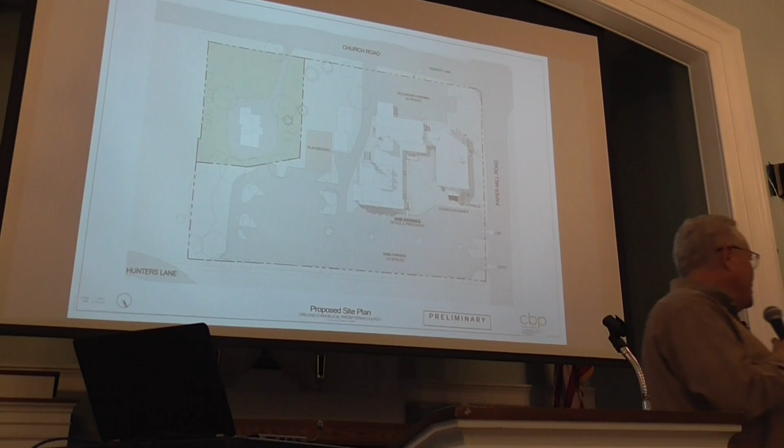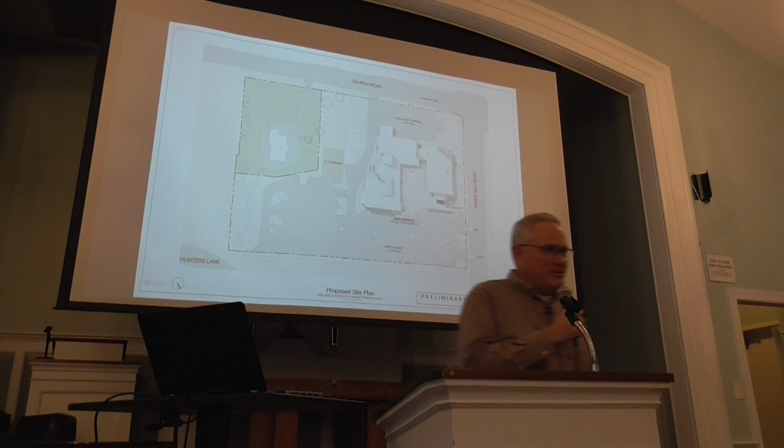So let's just look to God in prayer. Let's pray. God, we are thankful for the opportunity that we have to be here in this place. We're thankful for this congregation and its faithful witness over these many years. Lord, we look forward to continuing that as you give us able strength, courage, and grace to move forward. We want to be a beacon of your light and beauty in this community, in this place, in this corner. Father, give us your ingenuity and grace as we hear these exciting plans that have been in the works for some time now. We're thankful for the gifts that have been given to get us to this point, and we pray that you would be honored and glorified in it. We pray in Jesus' name, amen.

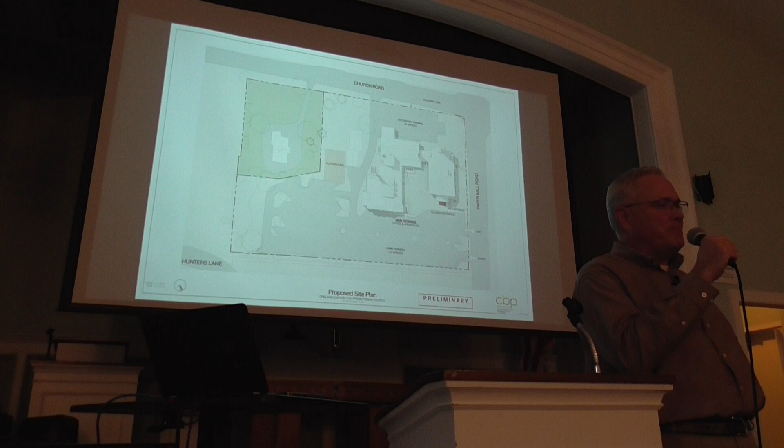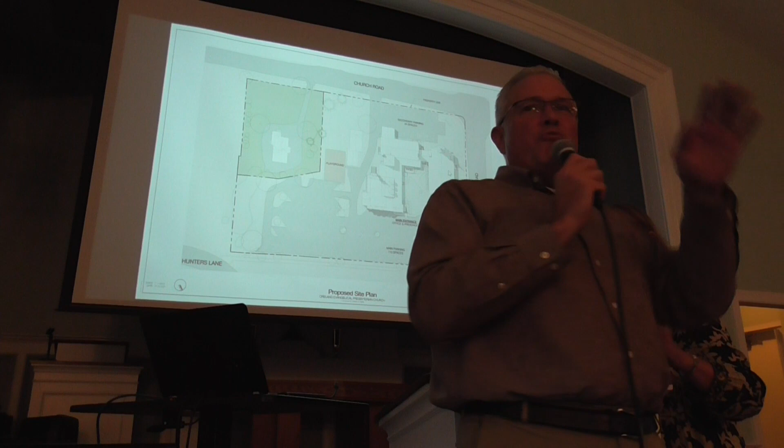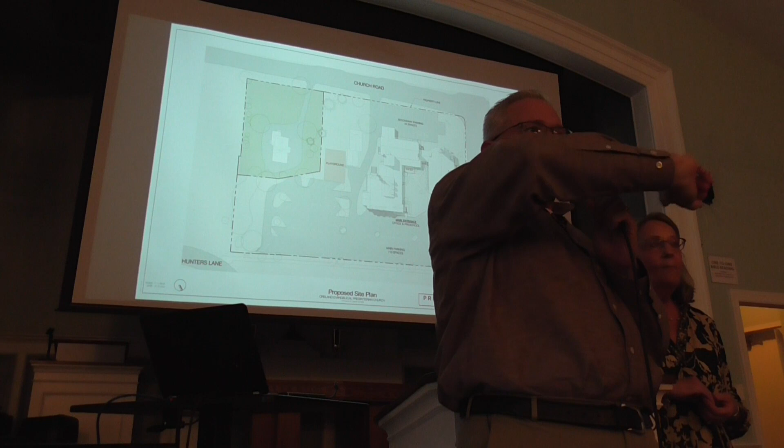Hang on, I'm sorry, I just want to introduce some of the arts team: Daryl, Rebecca, Tim. Am I forgetting anybody? Sandra, of course, myself. Also Janie Bray, Larry Schmidt, John Wynn, Graham, and Glenn Rossi. So that's the group that's been on this so far, and Adele Larkin had been too.

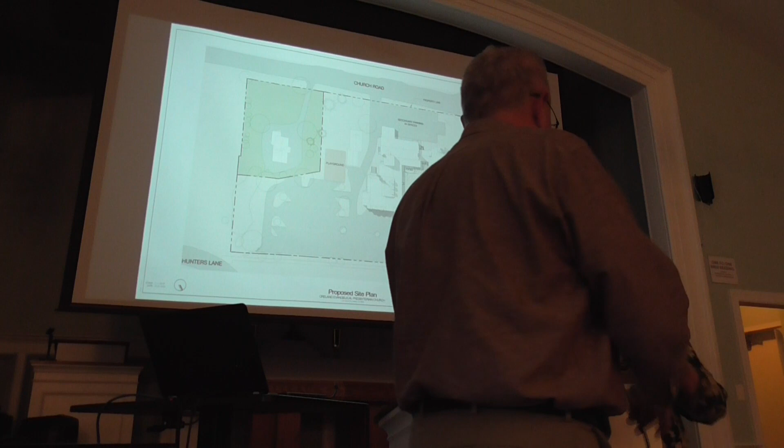Good morning, friends, or good afternoon. We are so excited to share with you today the preliminary architectural plans that have been amazingly designed and crafted for OEPC by Nancy Bastian and Nora Bergston of CBP Architects. Please join me in warmly welcoming Nancy, who is the managing partner, and Nora, an associate with the firm. Kindly take a minute afterwards and greet them in person.

I had the great pleasure of working with this firm years ago. They were superlative then and they are superlative today. From the outset, Nancy and Nora not only have listened to us, they have heard us. They thoughtfully processed all that we shared and showed a clear understanding of and respect for our vision and hopes, while honoring and embracing the opportunities of our beautiful facility and campus.

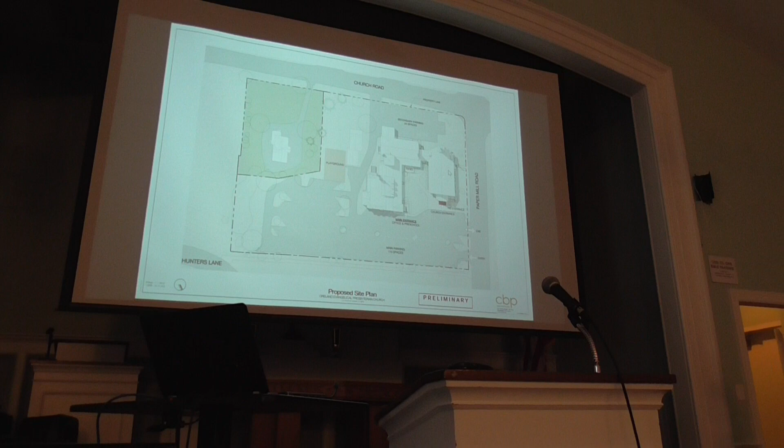Thank you, Sandra. Good morning, everybody. I am Nancy Bastian from CBP Architects. Just very briefly, we are a Philadelphia-based architecture firm. We're mid-sized, I think there's 18 of us. We're located in Old City, downtown at 2nd and Market. I have been with the firm for, I think, 36 years. It's a long time. The firm's been around for 41 years, and Nora's been working with me for at least 10 years, right? 11 years.

We do all kinds of projects. We do a lot of institutional work, a lot of residential work, some civic work. But we really love these kinds of projects where we come and meet with a group who are trying to figure out a puzzle. And this place is a puzzle, it's fair to say.

So I'm going to walk you through a little bit of what we saw when we came, and then Nora's going to walk you through what we're proposing. So just to orient everybody, what's up on the screen right now, even though it says proposed site plan, that's wrong, sorry. I just wanted to orient you all to the existing site plan.

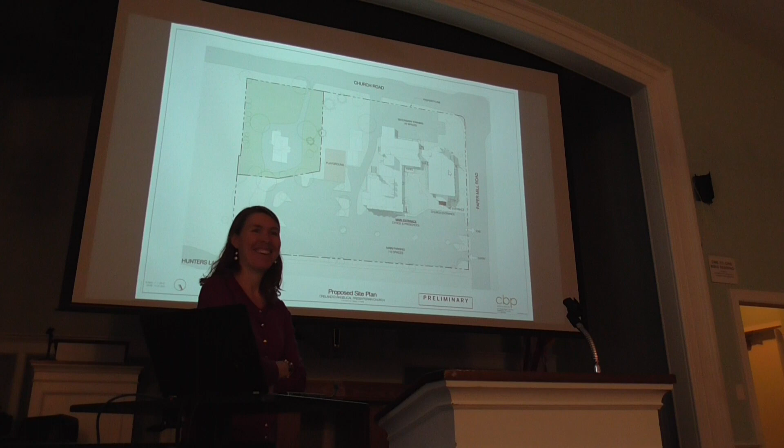Here you see the sanctuary, here's Fellowship Hall, here's the rest of your building. There's Paper Mill Road and Church Road. First time I came, they had me come in and park off of Church Road. I came up and knocked on a door and I'm like, something's wrong. Finally made my way around here and came in, which I realized is the main entrance. So that was the first thing I wrote down in my notebook. That's a bit confusing. But, GPS. Yes, the address, and that's where it takes you.

Yes. So anyway, here's your main entrance. Obviously, here's your main parking, about 110 spaces. You have a beautiful, large campus that accommodates quite a bit of parking. Here is that secondary parking, the playground area, as well as, is it the mini? The Little Man's. The little manse here, and then the manse here.

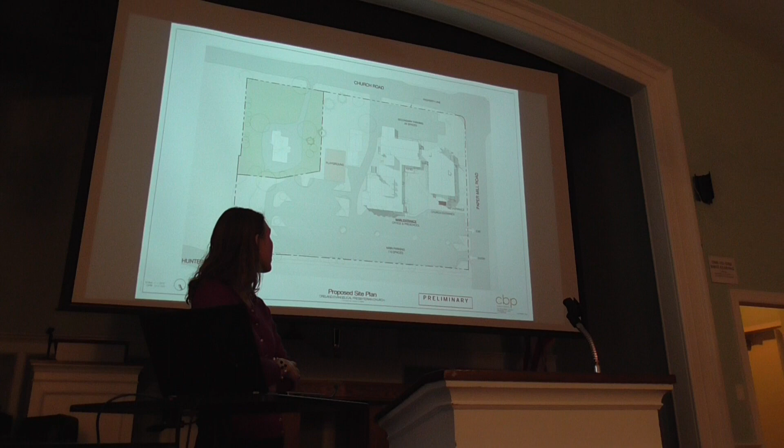So, you know, you have a wonderful property. I just want to orient everybody to where we are. And as you all know, here is the main entrance into the church, with the handicap entrance on the side. So Nora, you want to go to the next page. This slide I find really interesting because it helps explain how your building got to where it is today. The main parts of the building, besides the sanctuary, were built in the 1950s.

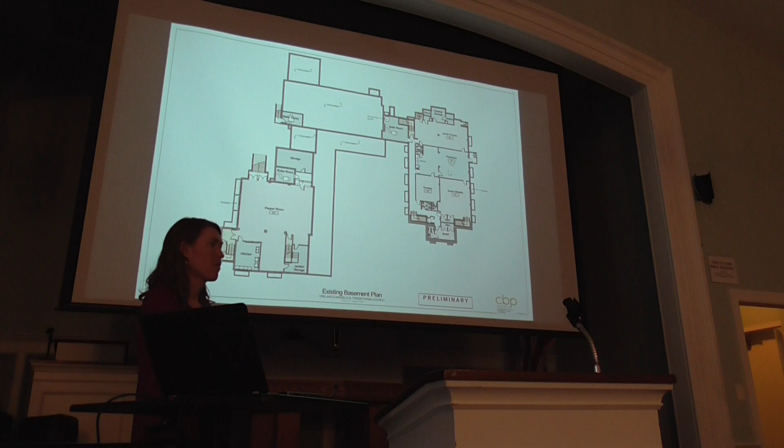If you want to go to the basement, the other interesting thing about your building is that as it was built over 40 years, some of the building has a basement under it and some does not. Fellowship Hall, the very first structure built here, does not have a basement under it. This addition done in the early 90s does not have a basement under it. Obviously there is a basement under the sanctuary, and there is a basement underneath the preschool classrooms.

Below them at the basement level is what you call the Pepper Room, which has a kitchen. And then underneath the sanctuary is that fourth preschool room, the music ministry room, the nursery, and what was the junior church. I don't think it's really the junior church anymore, but sort of not really used space down there.

We also noted that it's hard to get down there. There's multiple ways to get down there. It doesn't feel particularly inviting to go down there. I think some parents don't feel great leaving their kids in the nursery down there. And so that was an area we wanted to look at.

As Sandra mentioned also, we looked at handicapped accessibility as part of our study and analysis, and there are handicapped accessible ways to get into the building, but some of them aren't ideal. We always like, ideally, for everyone to come into the building the same way and not have a second way if you're mobility challenged. So that was part of what we looked at.

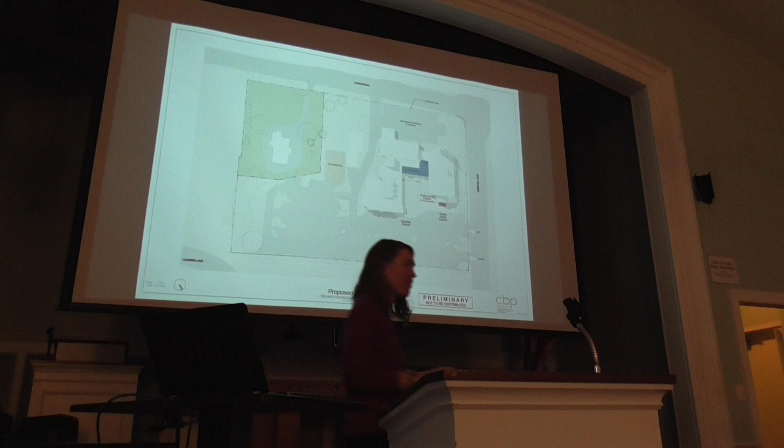Welcome, everyone. I too share what Nancy said about having met with Sandra and some of the people about seeing firsthand what a warm community this is. And so that is part of our thinking when we look at these new spaces: how can we reinforce that?

One of the main things this slide shows a little bit, but I hesitate after saying that there have been so many additions that we're proposing another addition. But in some ways it really is to tie everything together, and that's really the point. It seems like every addition was worthwhile, and yet somehow it's kind of missing this connective piece.

So what's shown here in blue is really just thinking about, right at the center, is there something we can propose that would allow for a place to gather and come together as a community as you're using this building. So that's the main issue.

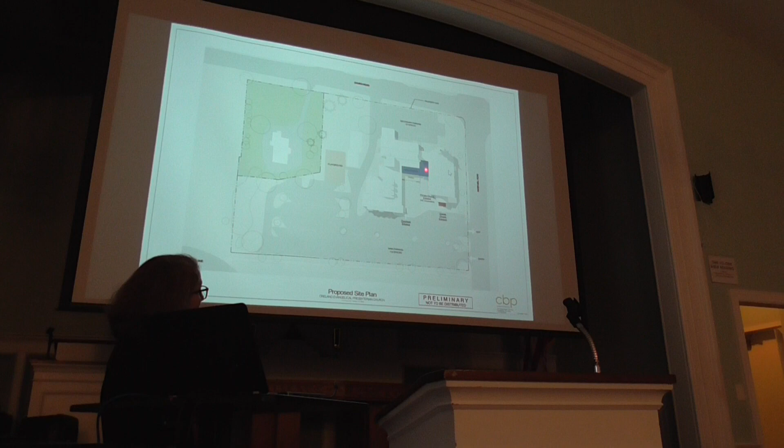We would still have this formal church entrance here, but we think there's a possibility of creating this new addition that will also enhance the use of that beautiful courtyard you have. Right now it seems like people kind of move in a U shape, but how can you really activate that beautiful space, the lovely flowers that are there. So anyway, that's kind of the overall idea, and I'll show you a little bit more about what we're proposing.

So if we go to the next one. So this is actually that existing plan, but just showing that area in blue as to, in a little bit more detail, where that would go. So it's just right outside these terrace rooms, and also trying to make a connection into this existing lobby.

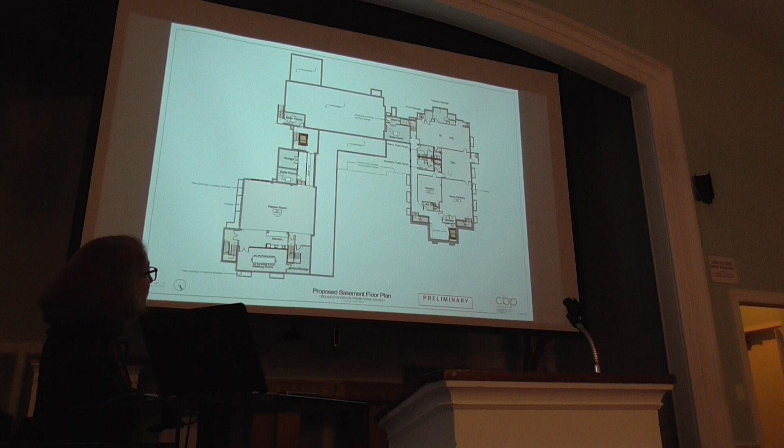We did entertain the possibility of actually making a connection, which in my mind makes the most sense—underground, you'd almost build a tunnel so you could go from this part of the building to this part. We don't know how feasible that is. I think it can be done, but from a cost perspective, we're not sure if it would be cost prohibitive, so that's why we're showing at least a second elevator here. But that's something to consider that we've thought about—we just don't know how feasible it would be. It would make the campus much more connected, because you'd only need one elevator, and from there you could go to all places essentially. So that's something we're considering.

But this would be a way for folks to get up and down from the sanctuary as a second means, using that elevator. So the next slide is the second floor—again, not too many changes here, other than bringing that preschool up to adjoin its friends. So all four preschools will be in the same area, two on this floor and two on the floor below.

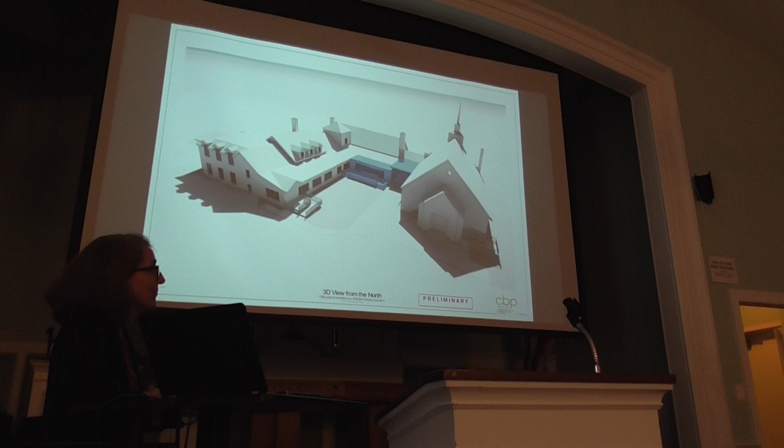So I think that might be the last slide. Yep. So just time for questions, I know that was a lot of words. Wait for the mic. Bill?

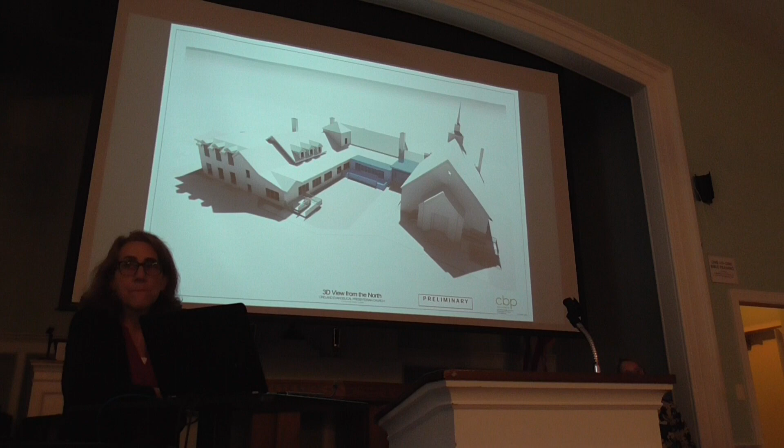Yes, I have two concerns that were not addressed in your presentation. The first is extending the elevator in the sanctuary building so the balcony on the second floor can be accessed. I think we've seen a need for that for those of us who use the balcony for a long time.

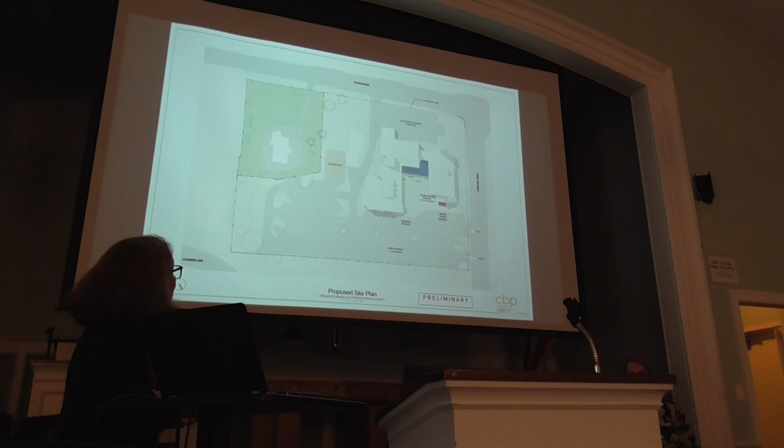Secondly, we have stuff stored here, there, and everywhere throughout the church, and a lot of it is like you put your foot on it and try to slam the door. Is there any thought about redoing the storage and consolidating, so we don't have stuff every place and you have to know what location it's in before you go there?

Sure, I was just going to say, in that basement floor we do have some areas of storage incorporated into the plans, but I think potentially there's some allowance once we've relocated the preschool room and the junior church, that would be a place for storage. We can certainly think about adding more consolidated storage if needed, but haven't gotten too far into the weeds about how much or what kind of storage you need. We could think about that going forward.

That's been an ongoing discussion, how to streamline things and make our spaces more efficient. In the process, there's been a lot of culling going on of decades of things, deciding what we need to keep and what we need to let go of. So we are very cognizant of that need, and it's something that has been an ongoing discussion, so that is being addressed.

One example of storage you may not obviously think of when you consolidate: I'm well aware there's preschool material stored all over the building and campus, because the preschool is spread all over. Once you consolidate that, it frees up a lot of that storage for the purposes those rooms will then be used for. So it's something to consider as well.

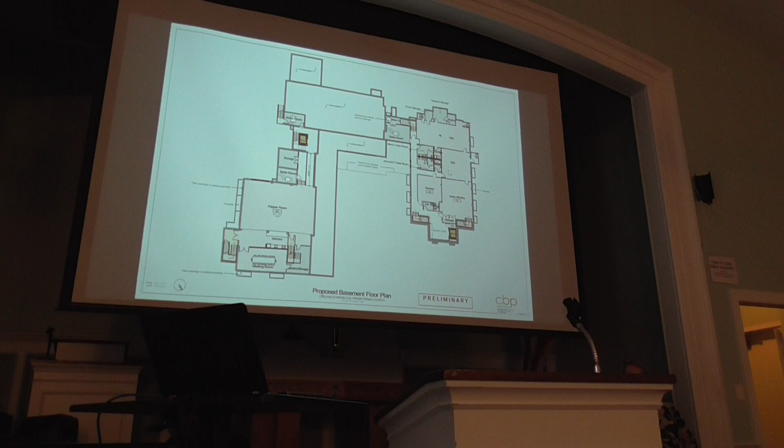Could you clarify, has the library been eliminated or relocated? There was a suggestion that it had the potential to be relocated to make it more accessible. Right now, schematically, it might actually be within the circulation area. There wasn't a need for it to be locked behind closed doors with a key; those materials could be more front and center. So the initial idea is putting it right in the main circulation area so people could access those books more easily.

The corridor you're talking about adding in Fellowship Hall, how many feet would we lose in Fellowship Hall? I would say maybe 7 feet at the back, so it would come to that door, just on the other side, the kitchen there. We understand there's a lot of programming that happens here, so we laid out tables to make sure they could fit. We think that area is almost used as circulation anyway, since people don't put chairs all the way to the end, otherwise you wouldn't be able to get to the kitchen. So it seems natural to dedicate that space, making this room without so much transition going through.

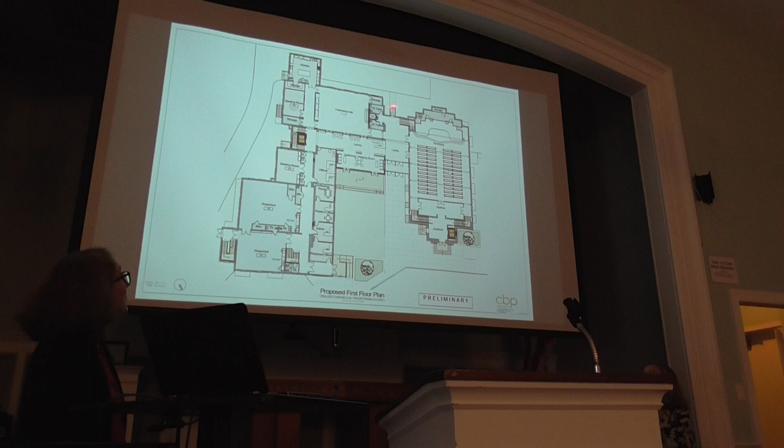Just on Fellowship Hall, we got rid of that. For example, there are doors, I think right out here, there's another door right next to this door. So that's another example of maybe we don't need or use that door. That was the original sanctuary door that's never used. Exactly, so now that you have a whole other sanctuary and multiple ways to get into this space, that's just an example of another door that could be dedicated storage without having people coming through.

And to the storage question, we're actually limited in what we can store there because while it's still an exit, fire code says it has to be kept clear. If that truly became a closet, that's a very large closet that you could add shelving and storage to. Right, exactly, and you have plenty of ways to come in and out of this room. You definitely need 2 ways out of a room this size, but we have multiple ways to get out of that room, so we don't really need this exit here.

Couple of comments and a question. Presbyterians love to eat, so I assume there'll be provision for us to put out our food and march through the line.

Another comment is that creating that entrance and consolidating the preschool will help us deal with some very appropriate security procedures we have in place, which on the other side can become an inconvenience when you try to get into the church for certain things. So with that separation, I assume there could be freer access through there and then limitations further in. Exactly, show that door, we've added a door in the preschool going into the hallway. Yes, it's very porous right now, I forgot that detail.

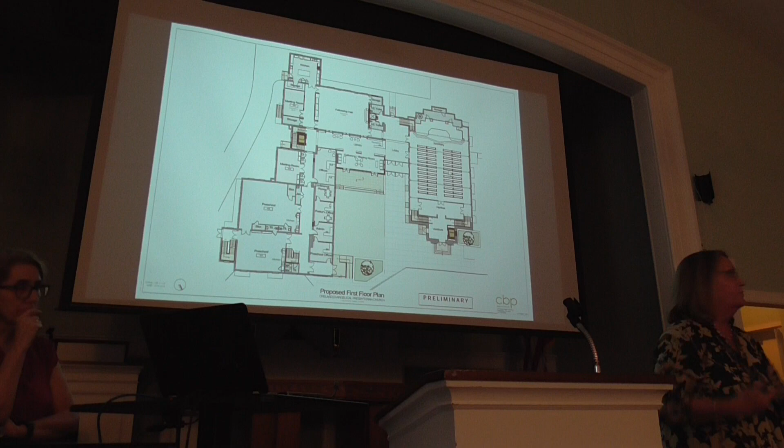Exactly, yeah. Over here, two questions please. The elevator in the sanctuary—is that blocking the current handicap ramp that goes up?

Well, yes, and at the moment we are suggesting that everyone would be able to come in through this main entry, just by a subtle ramp over this—I forget if it's 40 or 50 feet—that you'd be able to ramp up slowly so that everyone would be able to use this lobby. And theoretically, you wouldn't need that designated handicapped ramp.

So if I'm coming only to Sanctuary Church on Sunday, I'm gonna go from the parking lot all the way down that ramp, all the way to the front, and then all the way back in someplace. Yes, it does extend the route a little bit. It definitely does extend the route. Our current handicap spot is back right where we removed benches.

Back right? Oh, right here. The last pew inside, the last pew has been removed. Oh, I see what you're saying, right, so that a chair can comfortably be. Yes. So that's a long route.

It is a longer route, I agree, and that's why I would love to not have this elevator. But I think that's just the location that we thought might work best, but we can look at other locations—even just moving it to this other side, for example. But again, there were multiple ways to get in, so we chose this side, not thinking that you would necessarily need that if you had a main entrance.

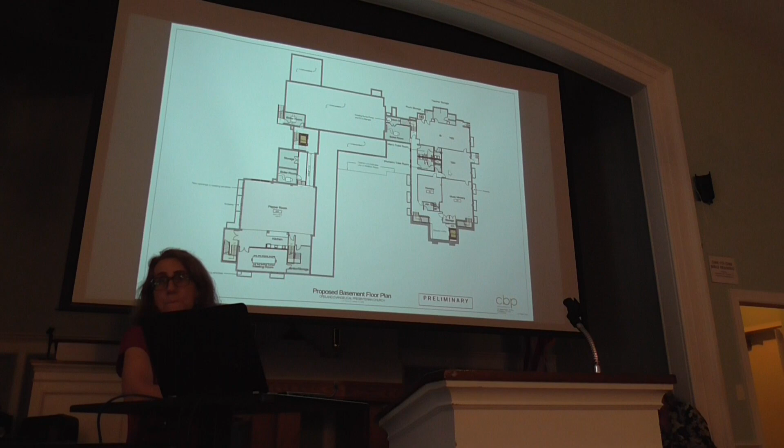My question— okay, can you hear me? Yes, yes, it's working now.

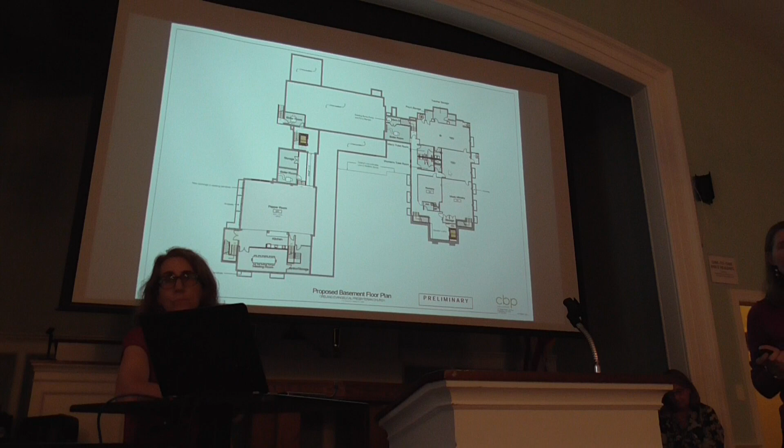The entrance during the week that you call the preschool entrance—will the offices in that area continue to be the same? Because I feel like your new entrance is for occasions, but practically speaking, that area will remain as it is, basically? Well, it will be space for offices. How they're configured is still to be determined. There might be someone here, but we anticipate everyone being able to come into this main entrance and have somebody at a desk, and that offices are still in this location. It's just not clear who's where necessarily.

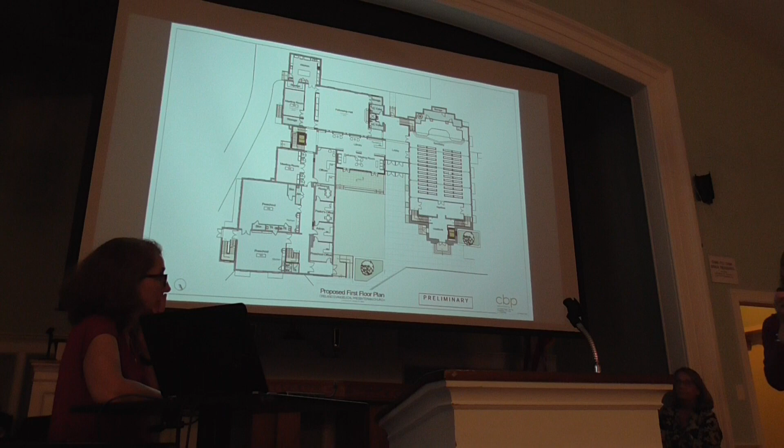It just seems like it's one more person that has to be there if you're coming in that entrance during the week, and I question whether that's necessary. At this point, you get to the door and you're let in if you're supposed to be here. That's true, there is a bit of a gap between this reception person and people in the offices. I think what may have tipped the scales a little is the idea that the preschool entry could be autonomous—trying to make that its own entrance and provide a different way for folks coming to the church. So then the thought was there would need to be a person five days a week at the entrance in the middle, because that's where everybody will be expected to enter.

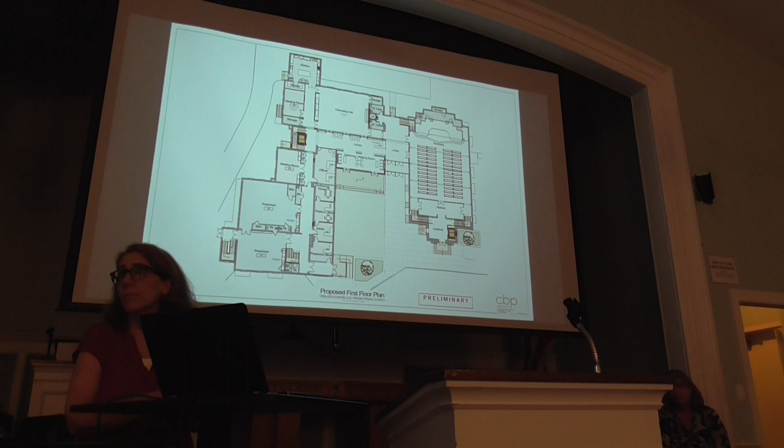But is there somebody here currently? There's volunteers everywhere, yeah, I think that's the intention. Just a comment about that—don't think of it as where Dara and Tony and everybody currently are staying and now we have to add someone. We would most likely move Dara or someone to be closer to that welcome center so it serves the exact same purpose as the current entry, where she sees people coming in. There are opportunities along that office wall next to the greeting rooms for windows or something like that—I think there are windows right now, at least where the platform is. So that becoming the main entrance will create a much more welcoming space, and it'll still operate as a functional check-in point for Dara and whatnot.

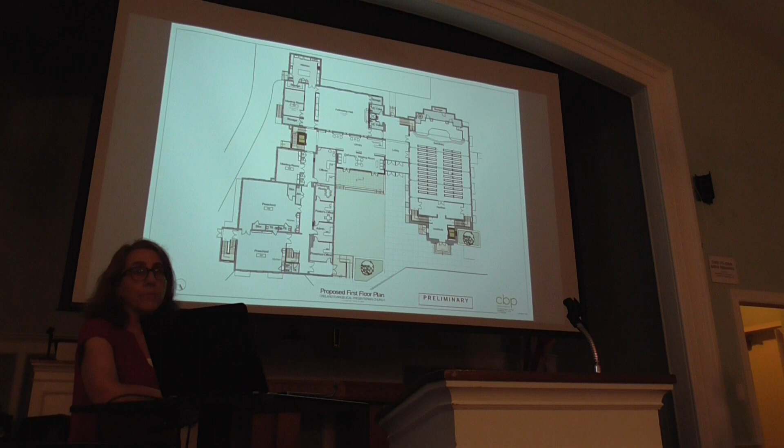I just have a comment. First of all, I think you did an amazing job with the existing structure to change it the way I think most of us want it to be changed, okay? And I think the addition coming in through the courtyard is spectacular. That's my opinion, but I think the opinion of everybody would be that we owe Sandra and her team a real vote of thanks for the hard work.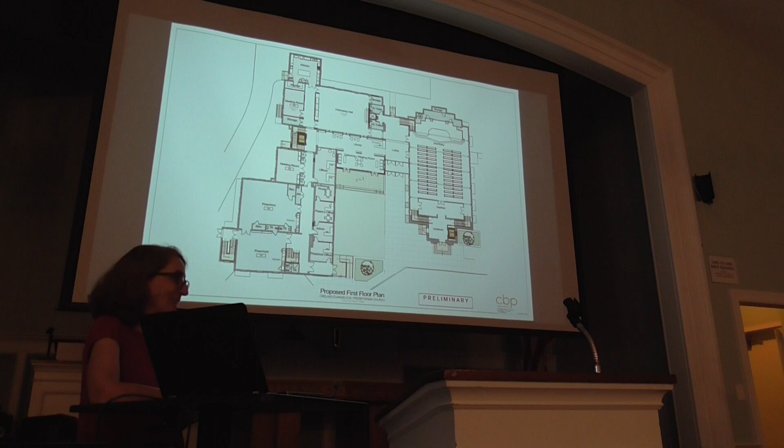It has been so collaborative, and it's really been a joy. I mean, yeah, it's been such a joy working with you guys. I know our work is not done, and everybody on our team, we've been unanimous on every key decision that we've had. So these guys have done the lion's share, so thank you.

Can I just add something about the administrative offices? For all of our discussions, that probably is not something we focused on, because that is more of a construction document phase, is that correct to say? That it would be really, right, design phase. So the administrative offices, again, this is very preliminary and it's very fluid. So who goes where is not something we spent much time on. The focus has been this pod, taking the vision committee's and the needs of the church and where the church is going, growing our outreach, what is the priority? So it's been the pod, the preschool's now stacked, and the youth program is phenomenal.

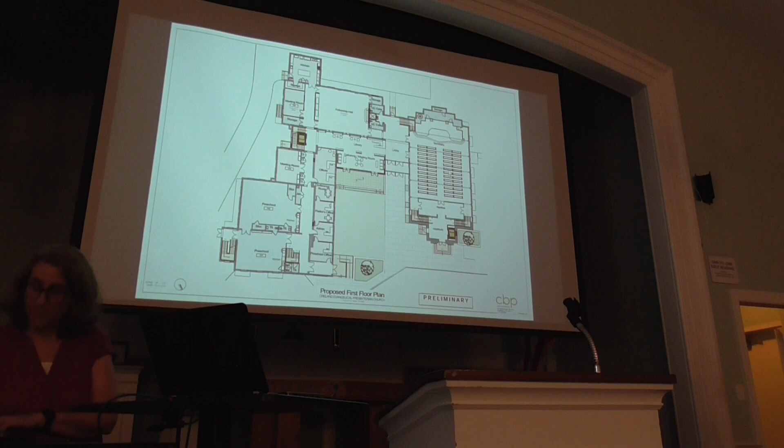If that elevator goes in, you now have the downstairs area connected to up here. So all of the youth is basically consolidated, and the preschool is stacked and it is secure. We're taking, just like any budget project, you say, what are the most important things? This is what we have gotten from all of you, from all the work the Vision Committee did, the work we've done, from Nancy and Nora's amazing input of what are the priorities. That's why we stamped everything preliminary.

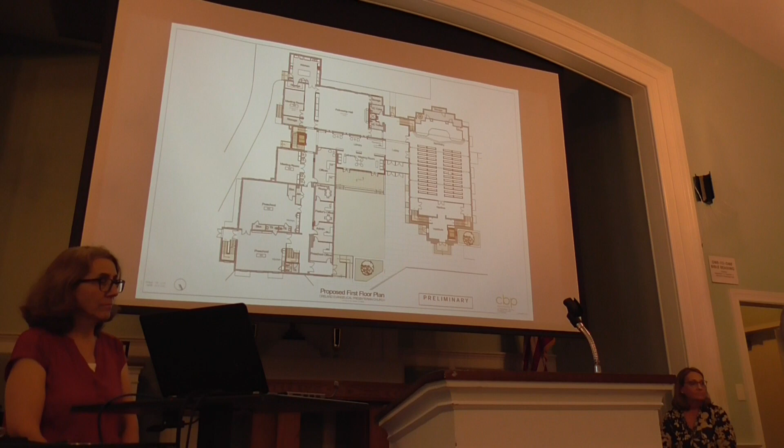There's a huge need, I think, as you know, during the week as people come in, just to have a place where they can hang out and have a cup of coffee. I think if we had, as part of the vision team, as we're talking about that, to have that for preschool families, that we come in and say, hey, come down here and have a cup of coffee, sit and talk, instead of in the hallway. So there's all these neat opportunities that we have to see happen and to grow, and it's pretty exciting.

So we need your prayers. We need your prayers as we contemplate next steps and what that looks like. And again, we're thankful for all the work of the team, and Bob Asher was part of that — we forgot Bob's name, sorry Bob, that was bad — but he's been part of that team as well. So just want to thank everyone for that. Thank you, Nancy. Thank you, Nora, for coming.

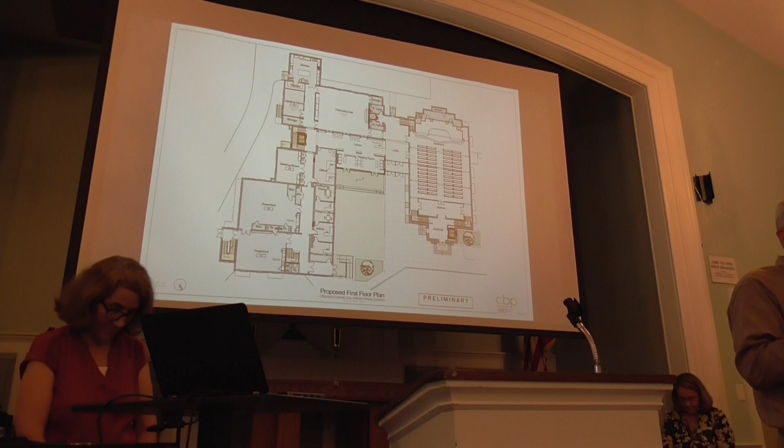So let's just close in prayer, and then feel free to come up and look at the plans. Father, again, we thank you for what you're doing in this place, and we give you all the praise and all the glory, Father. It's for you, and it's because of you, Father, that we exist and why we're here. And so, Lord, we want to steward what you have given to us and use it for your glory and for the furtherance of your kingdom. We bless you in Jesus' name. Amen.

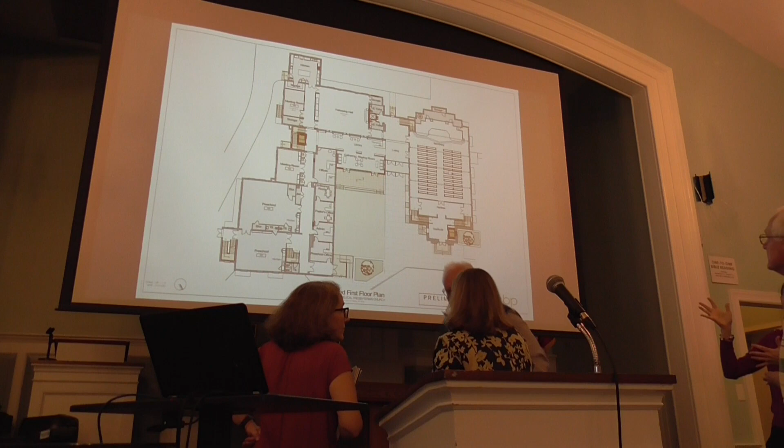I appreciate your friendship. It's really good. That's all.